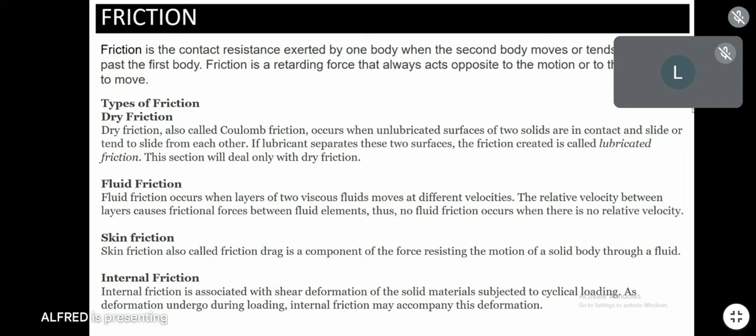So nangyayari lang yung friction kapag mayroon kang contact resistance, or siya yung mismo yung contact resistance. And friction is a retarding force that always acts opposite to the motion or to the tendency to move. Gets niyo yung definition ni friction? Yes po. So importante na alam nyo na siya yung opposing force para pag gumawa tayo ng free body diagram, pag nag-expose tayo ng mga forces, alam nyo yung direction ni friction, kasi importante yung direction ng force because force is a vector.

So we have 4 different types of friction: si dry friction, si fluid friction, si skin friction, and si internal friction. Si dry friction, nangyayari siya pag two solid objects yung nagkakaroon ng sliding, pag nakapatong yung isang solid object to the other solid object. Yun yung pag-uusapan natin ngayon, more on dry friction. Kasi yung fluid friction, it can be applied on the subject like fluid mechanics and hydraulics, hydrology, so basta usapang tubig. Kasi the fluid friction is between two viscous fluid.

While your skin friction naman, may encounter nyo siya sa geotechnical engineering, more mostly sa pag nagte-test na ng boring, boring logs, boreholes, so boring test wherein magbabaon kayo ng bore logs sa lupa. Bore logs are metal, so that's a solid object, and yung lupa or yung soil meron siyang water content, or meron siyang water level. So pag umabot dun yung boreholes, magkakaroon ng friction in between the solid and the liquid object, that's what you call skin friction.

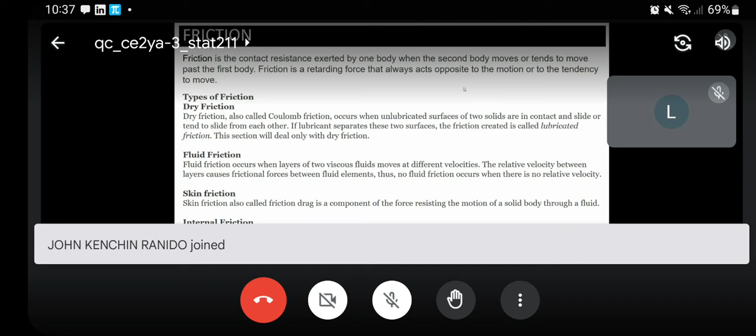Okay, and then internal friction naman, so nangyayari ito sa loob, kaya nga internal friction, di ba? So magkakaroon ka ng shear deformation dun sa solid materials, at nangyayari siya pag meron kang cyclical loading, and magkakaroon ka ng deformation, which is nangyayari in real life. So that's the 4 different types of frictions.

Do you have any questions so far? May tanong ba? Wala po. Okay, definition pa lang naman siya eh.

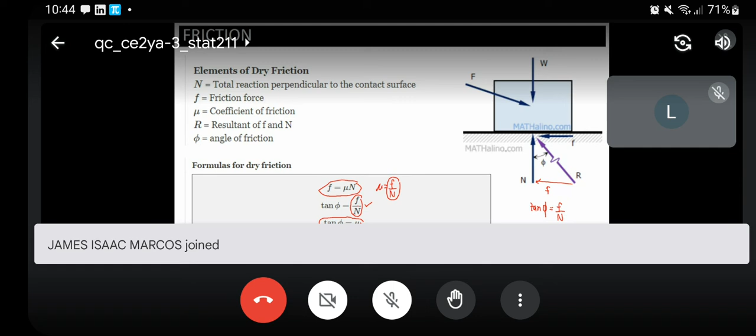No? So ito lang yung kailangan nyo tandaan. Saka to. And then you can simply derive yung tangent of phi is equals to F over N. May question regarding sa formulas? Wala naman. Wala po. Okay.

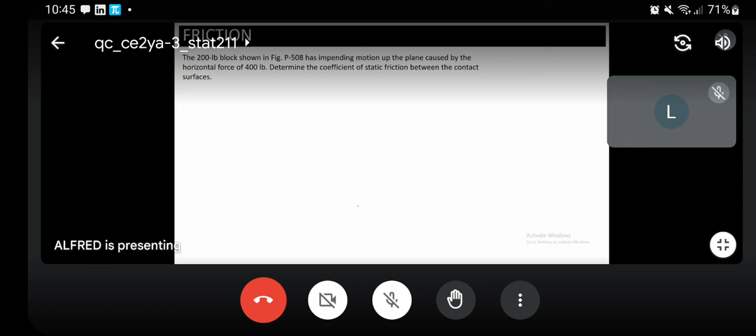So let's go to problem number 1. Ito, galing to sa Physics 1. So i-review lang natin paano yung friction kapag horizontal yung surface. And then for the next problem, kapag naka-inclined naman yung surface natin. Okay, so problem 1 muna tayo. So 400 pounds block is resting on a rough horizontal surface for which the coefficient of friction is 0.4. Determine the force P required to cause the motion to impend if applied to the block horizontally for letter A. And for letter B, if your P is applied downward at 30 degrees with the horizontal.

Okay, so kung nag-physics kayo sa akin or sa ibang prof, medyo familiar na sa inyo to. For letter A, this is your horizontal surface. This is your block. Okay, so ito yung tinatawag na contact surface. Ayan, so ang weight daw niya is 400 pounds. Okay, and then your mu is 0.4. Yun na yun. Yun na yung given, no?

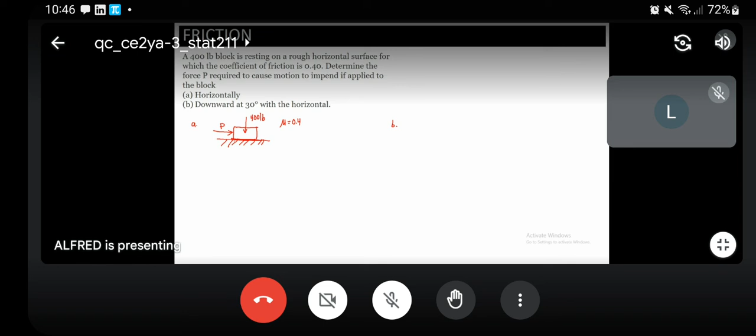And your P is applied horizontally. Okay, so let's say papunta sa kanan yung P natin. No? And then for letter B, same horizontal surface, same block, same weight. Okay, same coefficient of friction, but different orientation ng P or point of application. So this is 30 degrees. Okay, so applied downward at 30 degrees with the horizontal. Do you have any question regarding the problem, the figures?

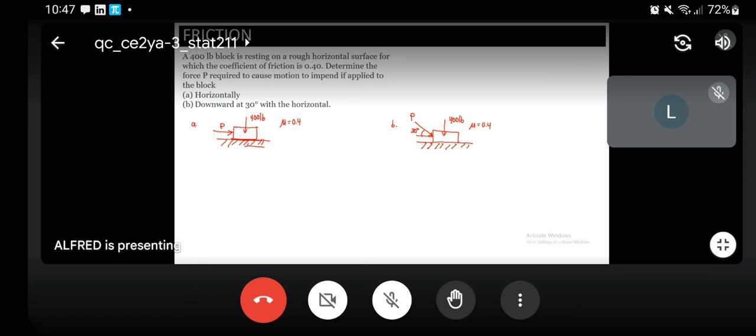Wala naman. Okay, so pwede na natin expose ngayon yung mga forces natin. So ano pa yung nawawalang dalawang forces? Si N saka si F. Okay? So since ang P natin is applied directed to the right, no? So meaning mag-move yung block natin to the right. Okay? So kailangan natin ng opposing force which is the friction. So that's going to the left. Okay? And then yung normal force natin, pag may contact surfaces, meron kang normal force and that's your N. Okay? So tatandaan nyo lagi silang perpendicular or si N is always perpendicular dun sa surface natin. Okay? So ganun din dito. No? So this is your F, this is your N.

And they are always perpendicular. Okay, so let's place this on the Cartesian plane, X and Y axis. So you have here your N, you have here your 400, P pointing this way, and F pointing this way. So three unknowns, but we can say that F is equal to mu N, meaning your F is equal to 0.4 times the normal force. So let's see how we can solve for P, or the value of P.

I'll first use summation Fy equal to 0, because there's only one unknown there. For X, there are two unknowns. So let's do Y first. It is N positive minus 400 which is going down. So solving for N, it is equal to 400 pounds. Simple as that, right?

And then summation Fy... I mean Fx na tayo, since Fy is done. So by solving summation Fx equal to 0, we have negative F, then positive P is equal to 0. So solving for P, which is the unknown in the problem, it is equal to F, and our F is equal to 0.4 N. So this is 0.4 times 400.

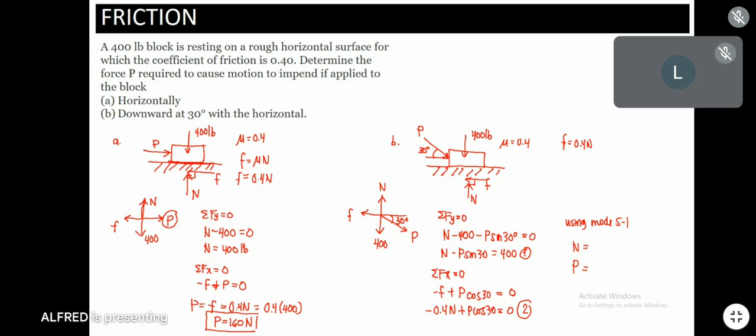So you can solve for N and P. What's the value of N? So what's your N? It is 1, negative sine of 30, then 400, and then negative 0.4, and cosine of 30, then 0. So your N is 520.12.

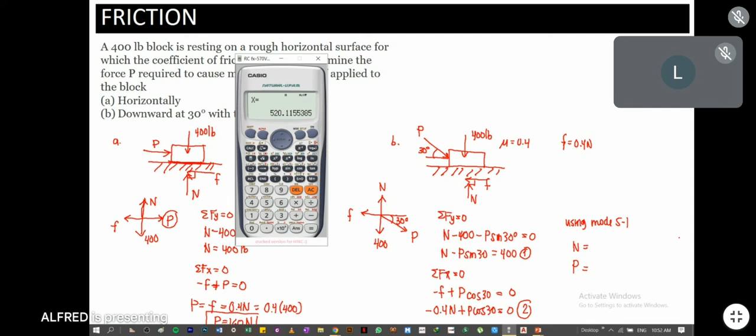What's your P? It is 240.23. Okay, so P is what we're looking for. So this is our final answer.

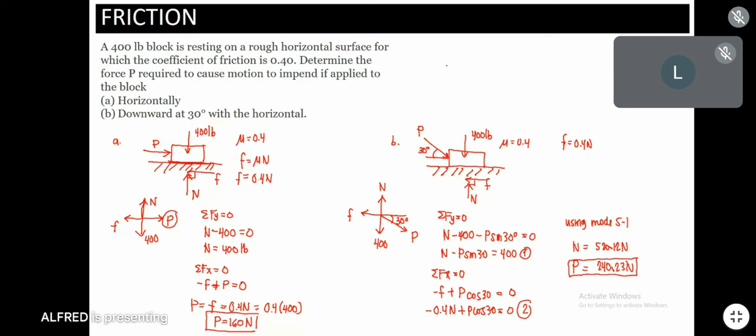Let's proceed to problem number 2, wherein the surface is inclined. So you have two solutions for this problem: either use the original axis, or use the rotated axis. Let's show both. If you want—if you don't want, we'll just do one. What do you want? Both? Both, sir. Okay, sure. So let's look at the given in the problem.

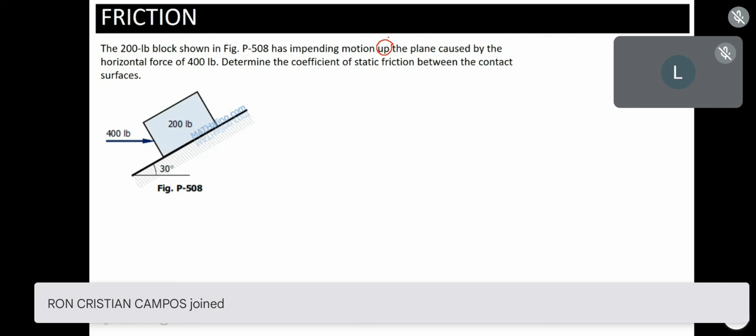The 200 pound block shown in the figure has impending motion up the plane, caused by the horizontal force of 400 pounds. Determine the coefficient of static friction between the contact surfaces. So the coefficient of friction is what we're looking for—that's mu.

Okay, and alam natin ang formula ni mu, it is F over N. So ibig sabihin, kailangan nating mahanap si F saka si N bago natin makuha yung coefficient of static friction, si mu.

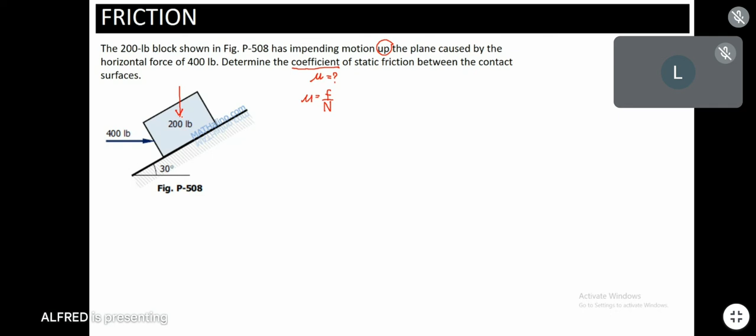Okay, so i-expose muna natin yung mga forces. So this is your weight, which is 200 pounds. At nandito yung normal force, dapat perpendicular siya dun sa surface natin. Naka-incline yung surface natin, so perpendicular pa rin siya. At yung frictional force ay susunod sa orientation o inclination ng surface natin. Lagi silang perpendicular.

Okay, so that's the unknown forces. Dalawa lang yan, si F lang saka si N. Kasi hindi natin pwedeng i-express si F in terms of N dahil wala tayong value ni mu. Kailangan natin mahanap si F as F, hindi as in terms of N.

Okay, solve natin. Kung lalagay ko siya sa Cartesian plane, this is your W, which is 200 pounds. This is your force P, which is 400 pounds. At nandito si N, at nandito si F.

Ano ang angle ni F from the horizontal? 30 degrees. Ano naman ang angle ni N from the x-axis? 60 degrees. So they are always perpendicular, dapat 90 yung total ng angle nila. Okay, so dun muna tayo sa original axis.

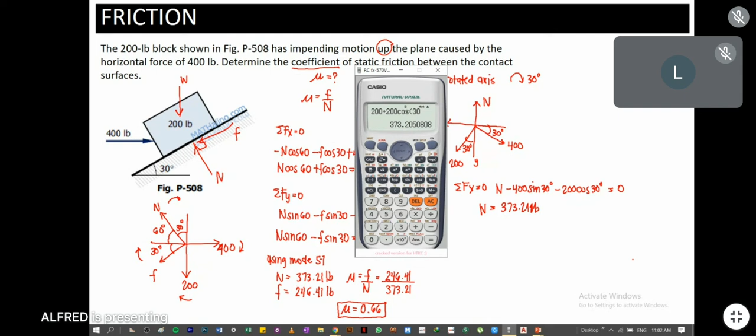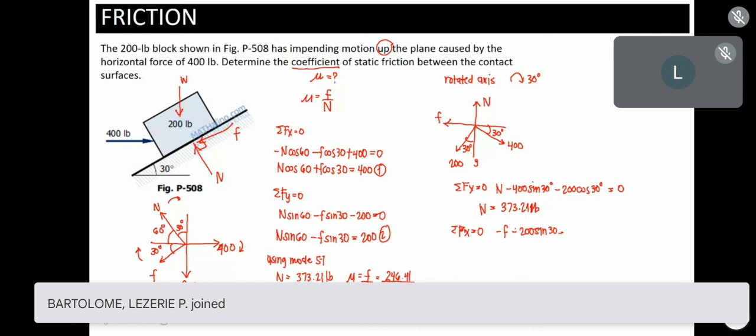Okay, at summation fx tayo is equal to 0. So negative F minus 200 sine of 30 and positive 400 cosine of 30. Okay, so what's your F? Lipat ko lang to sa kabila, tapos solve mo to. So what's your F? So it must be equal to 246.41.

Okay, at after that, punta ka ulit dito - ito na yung magiging solution natin, which is still the same pa rin yung makukuha natin. Okay, so that's how you rotate axis kapag naka-inclined surface ka. Pero kung kaya niyo namang mabilisan mag-solve ng ganito, dito na lang para sure, mamaya magkamali ka pa ng angle dito, so mali na yung sagot mo. So this is pang check kung gusto mong i-check, or kung ito yung solution mo, ito yung pang-check mo if you have time. Ganoon lang naman, either of the two will do, same answer lang naman. So which one do you prefer - yung original axis or yung rotated axis?

Okay, thank you sir. Rotated? Yun sa exam, no? Rotated axis gagamitin natin. Hindi, biro lang. So whichever you want, kung saan kayo mas convenient, yun gamitin niya.

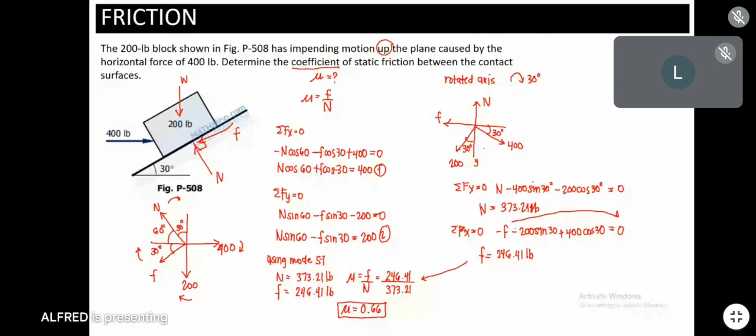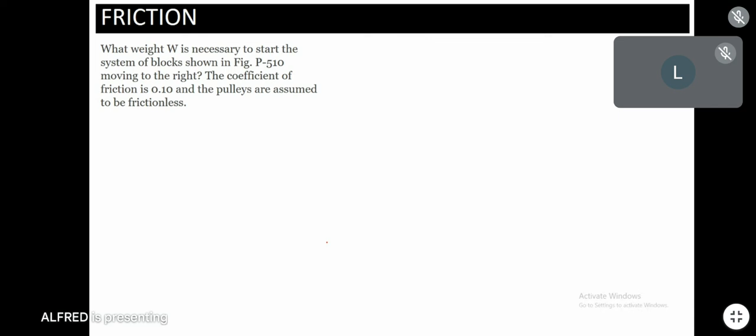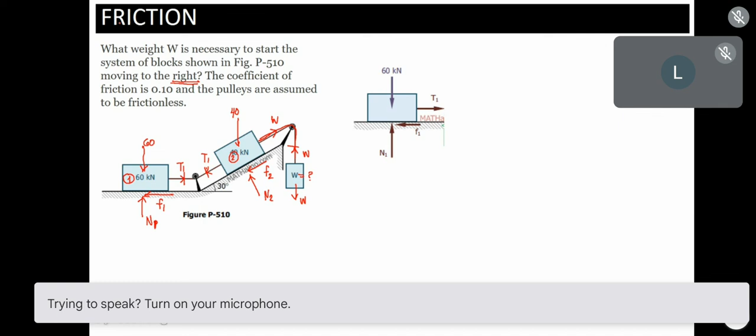Okay, medyo magulong tingnan, pero mas maayos tingnan yan kung ihiwalay natin yung horizontal saka yung inclined surface. So this is the horizontal surface - tama naman yung figure natin. And then this is your inclined surface. Nasundan? Pag may question, magtanong para di nang huhula.

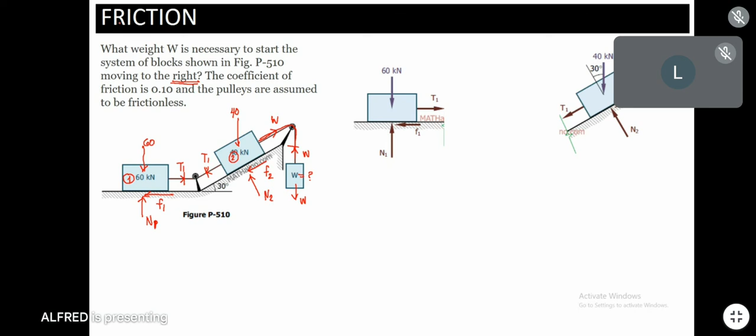So ano unahin ko, block 1 o block 2? 1, sir. Okay, so unahin natin si block 1. Bakit daw? Kasi mas konti yung force niya, di ba?

Compare mo dito, o kung titingnan mo yung unknowns, you have 3 unknowns here which can be reduced to 2 later on. And then this is a 4 unknown system - you have W, T1, F1, F2, and then N2. Okay, so kung i-reduce natin yung mga unknowns dyan, yung F1, we can say that this is 0.1 N1, and si F2 is also 0.1 N2. Bakit? Galing sa principle ni friction na mu n is equal to the frictional force. So si mu, given sa problem, 0.1. So that's your F1, 0.1 N1, and your F2 is 0.1 N2.

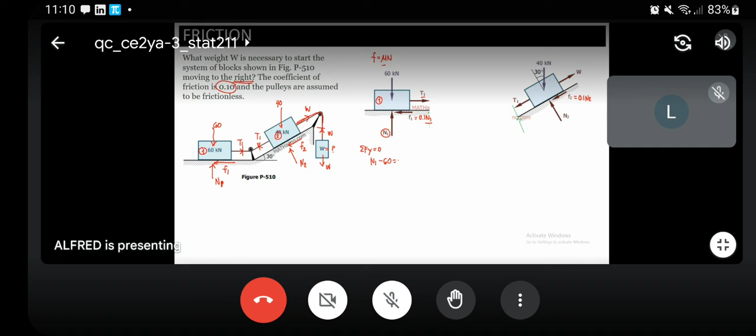Okay, so from that, pwede na akong magsimula dito sa block 1. Summation Fx or Fy? Tingin niya, Y po, Y po. Bakit? Kasi masasolve na kagad natin si N1, di ba? Unlike sa Fx, meron kang N1, meron kang T1, so di natin masasolve yung isa sa kanila. Okay, so summation Fy, we have N1 minus 60 is equal to 0, or we can say that N1 is equal to 60 kilonewton.

Gets? So next, summation Fx tayo is equal to 0, so we can solve for T1 minus 0.1 N1. But your N1 is 60, so if you want to solve for T1, it is equal to 0.1 times N1, which is 60. So your T1 is just 6 kilonewton.

Nasusundan pa? James, Isaac, may question? Wala po, sir. Mateo, Gudicelli, may tanong ka? Wala po, sir. Lawrence? Wala po, sir. Jesse, may question ka? Wala po, sir. Shaira? Wala po, sir. Charnel? Wala po. Okay, so kung walang question, so we already solved T1.

No, so this is 6 kilonewton. Okay, so nabawasan yung unknown, naging ilan? 3. Pero since ginawa na nating 0.1 N2 si F2, ano lang nawawala? Si N2 saka si W. Ibig sabihin, we can solve the two unknowns using the two equations of equilibrium. Unahin ko na si summation Fy and si summation Fx yung sunod. So bago yan, lagay muna natin sila sa Cartesian plane para mas madali nyong makita.

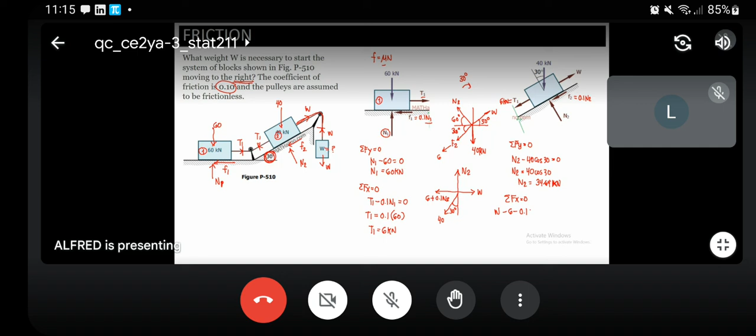Okay? And then solving for W, which is the required dun sa problem. So we can say that summation Fx is equal to 0. So we can say that W minus 6 minus 0.1 N2 and minus 40 sine of 30. Okay, so what's your W? It is 40 sine of 30 plus 6 plus 0.1 times 34.64. So what's your W?

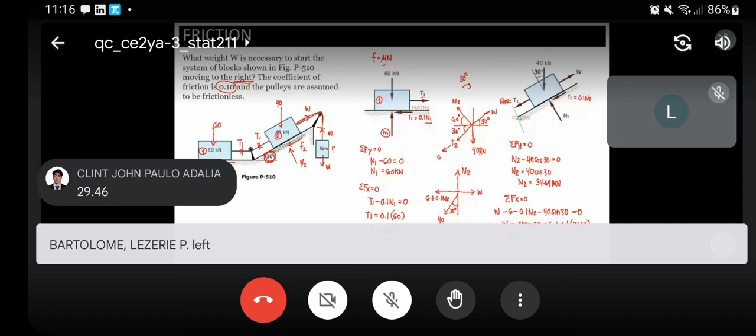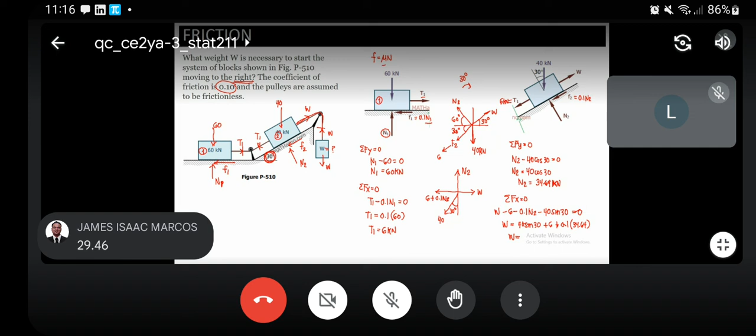May question ba kayo? May mali ba akong sinulat? So it is 29.46. Okay? So check nyo na lang using mode 5.1 gamit yung axis na to. Okay lang sa inyo?

So ito yung summation Fx niyan, nung original axis, no? So it is W. Shortcutting ko na lang, no? Sakit sa mata. And summation Fy is, nakikita niyo ba? Yes po.

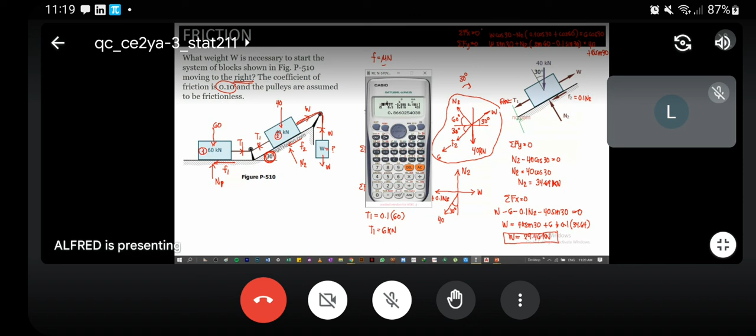So this is your x, which is W. So tama naman, no? 29.46. And this is your y, which is yung N2 natin. Ito, so that's 34.64. Okay, so regardless of on how you solve the problem, it's either you rotate the axis or kinonsider mo yung original axis, same lang yung answer natin. Okay? So mas madali to, kasi di ka na magmo-mode 5.1, ang haba niyan, no? Sinimplify ko na lang siya. Pero kung isa-isa nyo yan, tapos simplify nyo, ito yung lalabas. So check nyo na lang. Okay? Pag-aralan nyo na lang parehas.

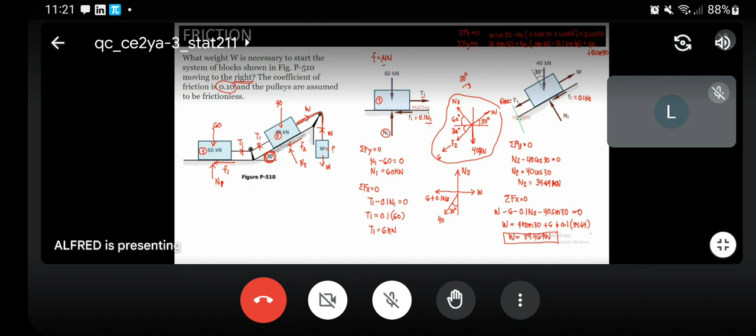May question ba regarding problem 3? Wala naman, wala po. Okay, so that's your problem 3. So kung walang question, how about the others? Ligaya, may tanong ka Ligaya? Wala po, sir. Leslie? Wala po, sir. Kate, may katanong kang Kate? Wala po. Kyla? Meron po. Anong tanong mo? Bukas po sir kung face-to-face o online lang po. Ano lang, online lang. Thank you po. Okay, so Kenshin, may tanong kang Kenshin? Wala po, sir. Dervy? Wala po, sir.